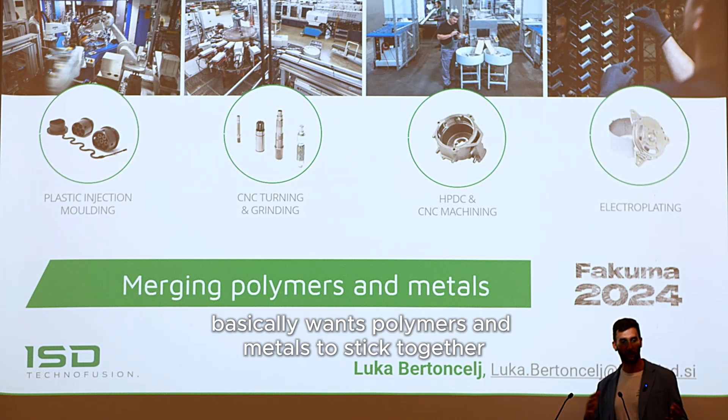Today I think we'll talk about quite an interesting topic: how to combine, join, or merge polymers and metals. We had a large discussion about what is the right word - is it merging, joining, fusing, or whatever? Basically, we want polymers and metals to stick together. This is one of the challenges that we kind of daily face. Just to have a background, our company has 4 major technologies.

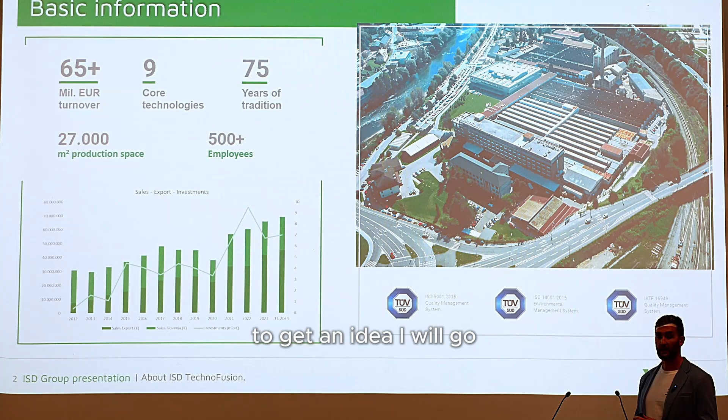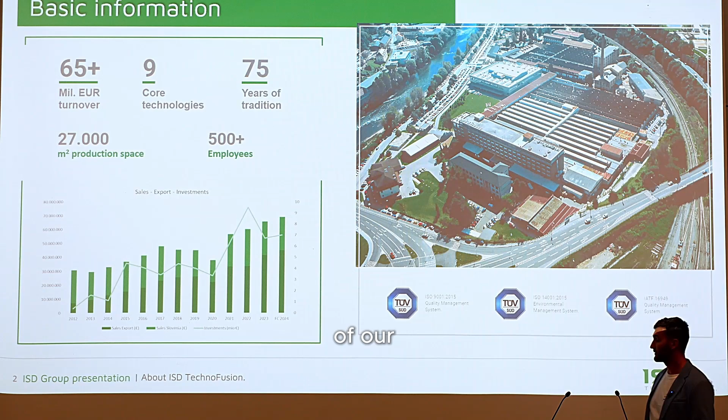We do plastic injection molding, turning, high pressure die casting with machining, and also electroplating. Just a few numbers to get an idea - I'll pass this quickly since it's an engineering presentation. I'd say we're a mid-sized European company, or a large Slovenian company, but Slovenia is small, so it's a large Slovenian company with just above 500 employees, around 65 million turnover, located in Kranj, close to the center of our city.

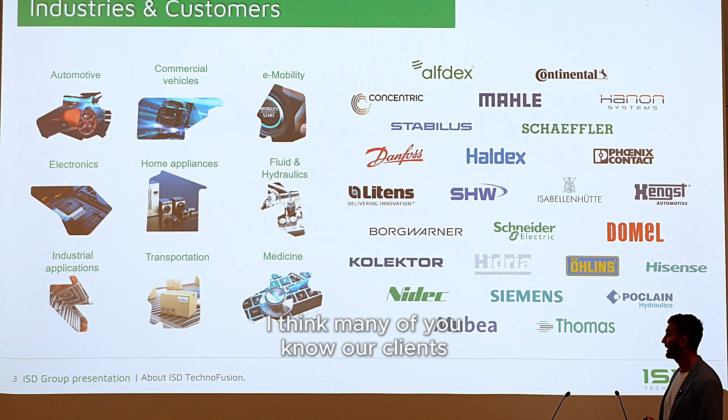We're more or less present in all major categories in terms of serial production, with automotive or especially commercial vehicles being the main one for us, but we're also present in electronics, home appliances, and basically all other areas. Here you can see the usual suspects - I think many of you know our clients. We're used to working with them, used to this serial production process and mentality.

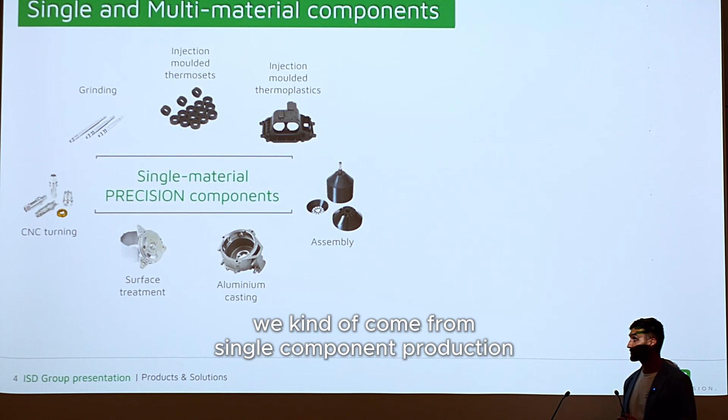Originally, I'd say we come from single component production - plastic injection molding, turning, high pressure die casting, and electroplating. But the real added value for us really lies in joining these technologies together. This means hybrid components - hybrid meaning combination of polymers, metals, or other materials. You can see the 9 major categories here.

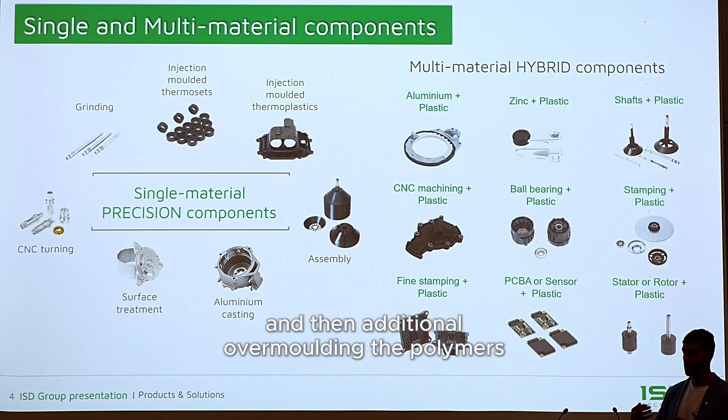The first one being high pressure die casting and then additional overmolding with polymers, then Zamak casting and overmolding, shafts first machined and then overmolded with different inserts, bearings, stamped parts, pins, connectors, again axes or shafts with stator packages and then overmolded, and also overmolding of electronics.

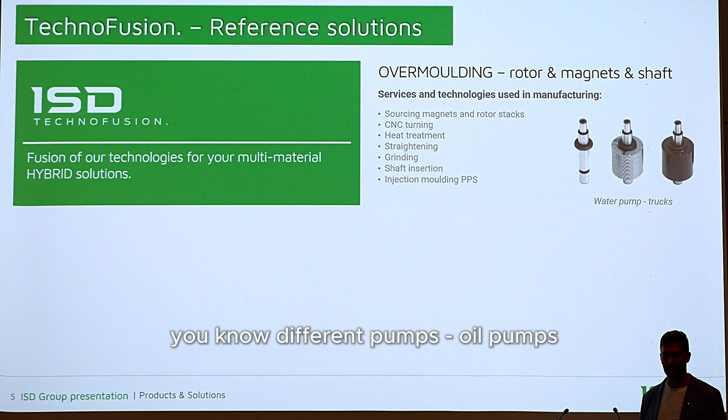To go perhaps a few more in detail in certain sections: overmolding of rotors and stators is one very important area for us, especially due to different pumps - oil pumps, water pumps - where you need a shaft that gets assembled with the stamped lamellar package and then overmolded with, let's say, PPS or PBT, then overmolding of shafts and additional magnet insertion, and also overmolding of stamped parts and bearings.

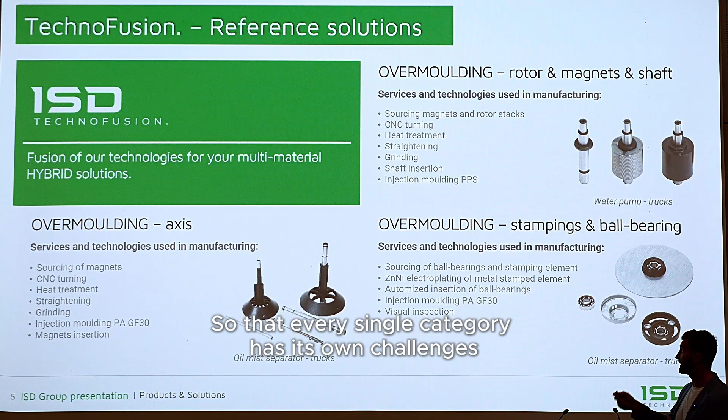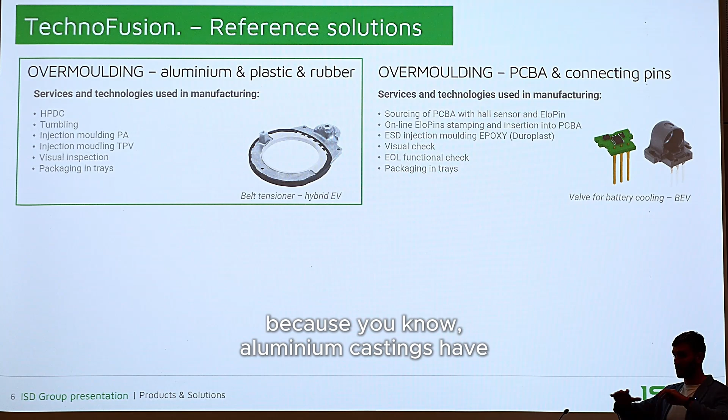Every single one of these categories has its own challenges. For example, if you overmold bearings, it's extremely important to have enough injection points so that you pre-tension the ball bearing all around, so you don't affect its lifetime. Every category has its own challenges. For example, overmolding of aluminum cast parts without machining is an extremely challenging task, because aluminum castings have a tendency to vary in thickness.

Overmolding of sensors or assembled PCBAs - again you have assembled electronics which can only sustain low pressures, not to be damaged. So we use special low viscosity epoxy resins to reach low enough pressures not to damage the electronics. Also overmolding of aluminum with aluminum, different shafts or inserts, and lastly overmolding of different pins, connectors, and so on.

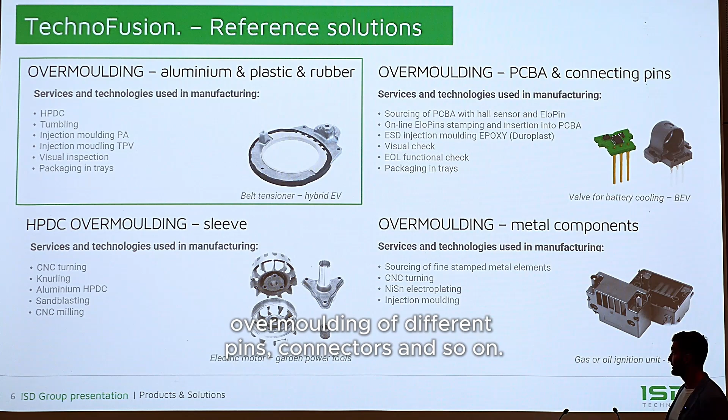What all these categories have in common is that we always try to bond or connect different types of materials, and their main problem is that they share no love - they don't want to stick together. They're like an old couple that wants to go apart, and now how to fix this connection, this bond between them - this is a very interesting area of research.

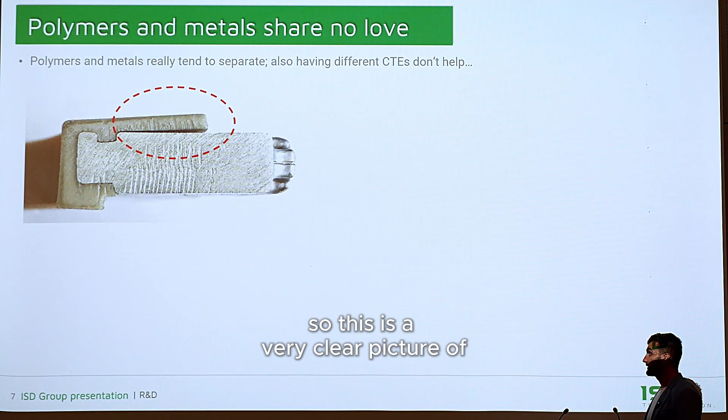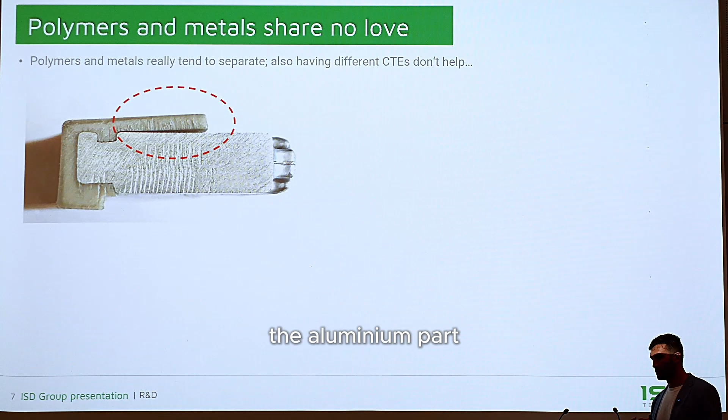This is a very clear picture of what problems we're facing. Basically you have, let's say, an aluminum casting, then you overmold a polymer on top, but the polymer wants to go apart. One of the challenges is that they have different coefficients of thermal expansion - if you heat up the component, the aluminum part will expand differently from the polymer part. You can compensate to a certain degree with different fillers - different portions of glass or carbon fiber or other fillers - but never optimally.

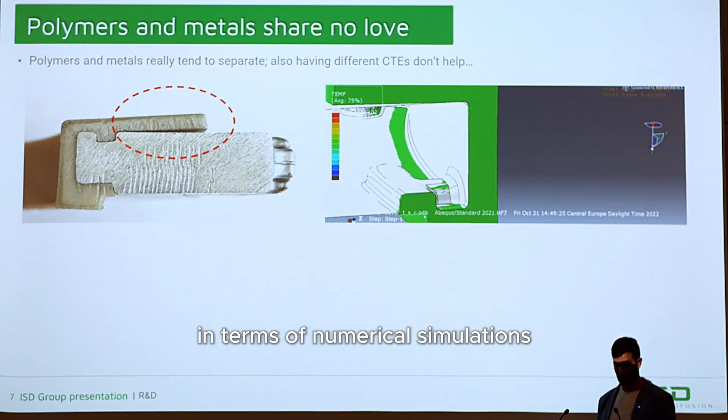And this can also be simulated, so all this can eventually be analyzed in terms of numerical simulations. But still, you get to a point where you ask yourself how we will solve this in production.

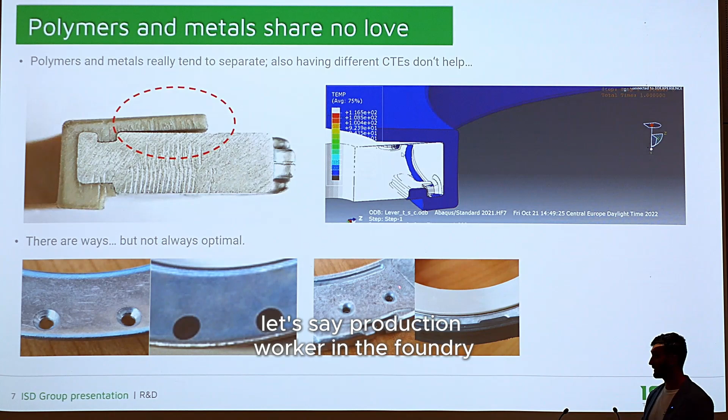There are different ways. Obviously you can have different holes or locking geometry on the castings or on the stamped parts. But if you talk to a production worker in the foundry or in the stamping industry, you will see that it's very difficult to deburr such holes or to punch them through. It's a very challenging task.

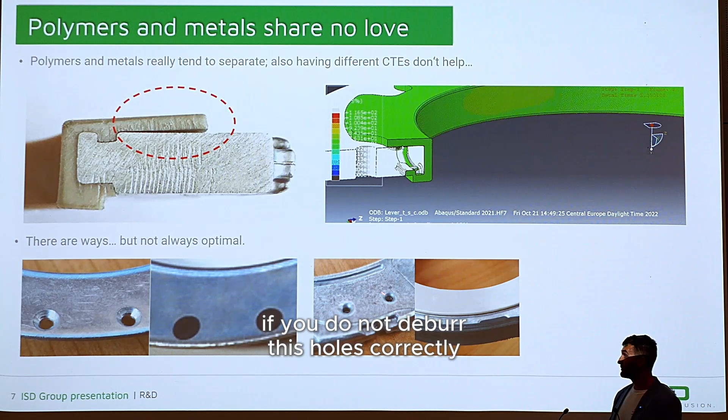If you do not deburr these holes correctly, when you injection mold the polymer inside, the hot polymer will remove some particles of the casting and flush them on the top surface, which causes scrap.

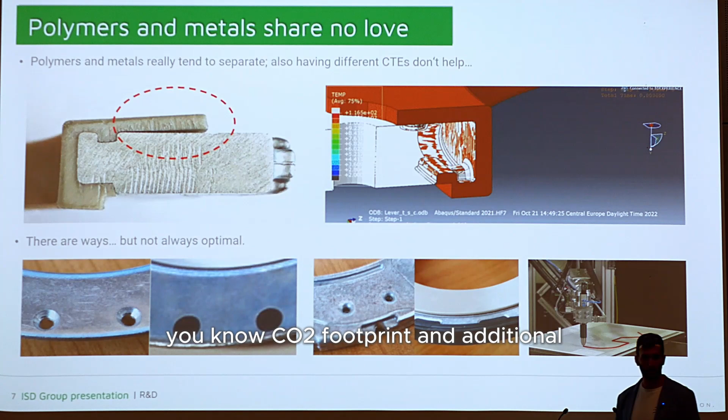Now the other way would be also with glue. But again, gluing is an unwanted process in terms of CO2 footprint, since an additional adhesive or chemical is used to connect them together. So it's not a favorable solution.

So in a way to tackle this challenge of combining polymers and metals, we developed, or are still developing, two technologies. The first one being LaserFusion, which I will talk about first, and the other one is SonoFusion, which is still in early stages of development, but I think a very interesting solution that might also be of interest to some of you.

So let's first move on to LaserFusion. Basically, LaserFusion is the process of using a laser source to modify the surface of the metal part. So why use a laser source?

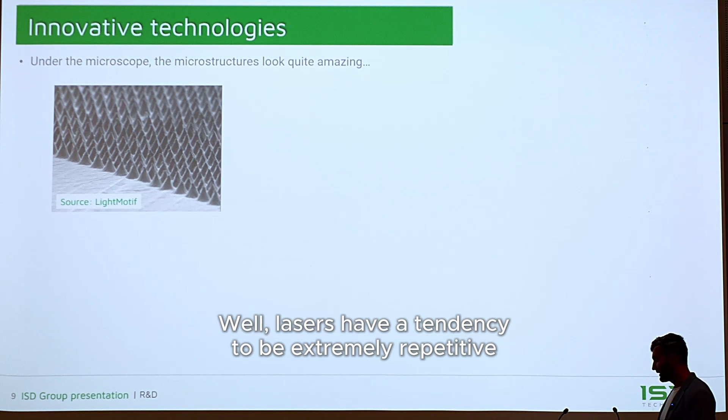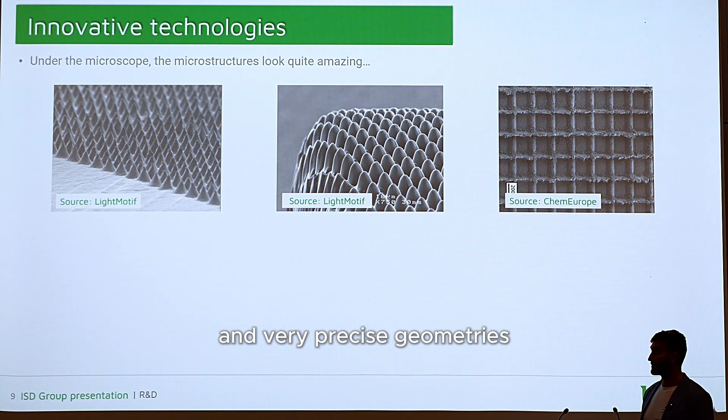Well, lasers have a tendency to be extremely repetitive. They have a very high repetitiveness. They're extremely precise. So if you take a microscope and look at different structures made using different types of lasers or different technologies, you can see that on a nanoscale or microscale, you can get extremely repetitive and very precise geometries.

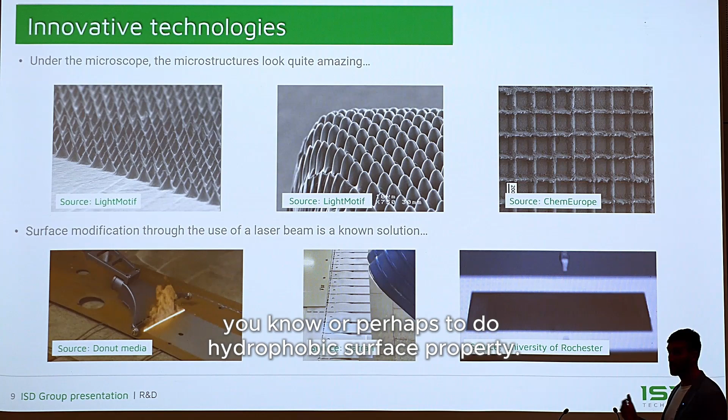That's one of the benefits laser technology offers. The other is that lasers have been used for quite some time, so they can be used for removal of rust on surfaces, to improve adhesion between adhesives and the second component, or to modify surface energy, or perhaps achieve hydrophobic surface properties. So basically, by modifying the surface structure, we can achieve a lot of different material properties without adding any additional chemicals, just by modifying the surface.

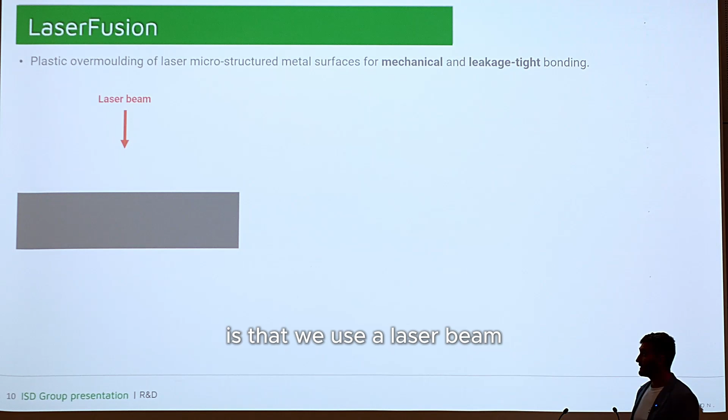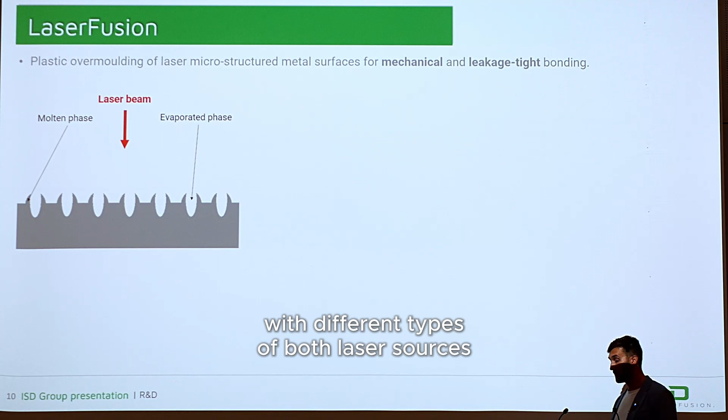So the way we do it, or a simplified physical concept of our technology, is that we use a laser beam which we focus onto the surface. We then partially evaporate and partially melt the surface using different types of laser sources and process parameters, and in some cases also surface preparations.

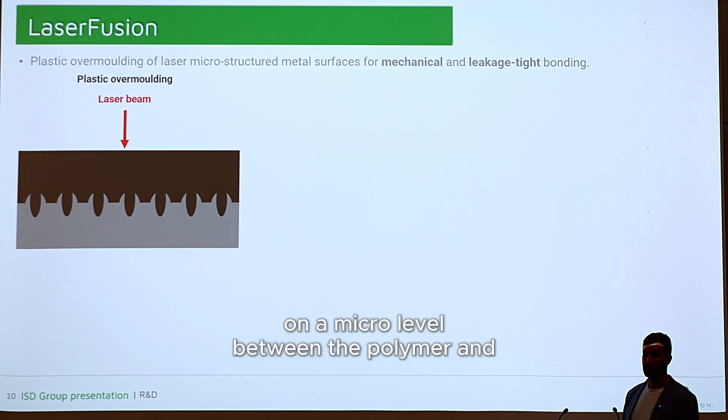We can then modify and get a negative mechanical locking on a micro scale. After this process, we do the overmolding, the injection overmolding, which basically allows us to reach a micromechanical bond on a micro level between the polymer and the metal surface.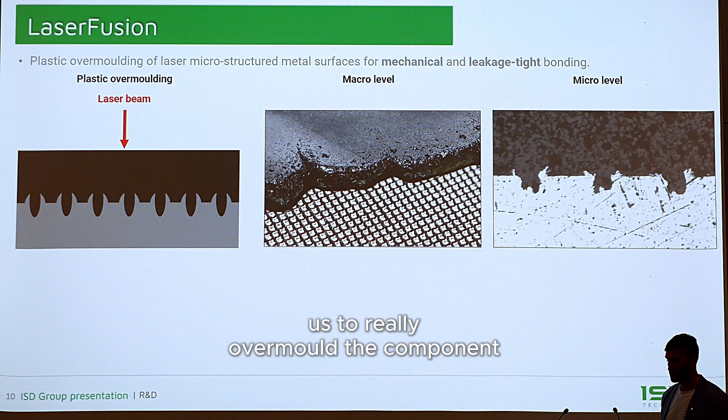So if you take your phone, because phones nowadays have very good cameras, you would see a very repetitive microstructure on a macro level that allows the polymer to penetrate inside. Or with a bit larger zoom or magnification, you can see very repetitive micromechanical locking geometries that allow us to overmold the component and achieve a polymer-metal bond.

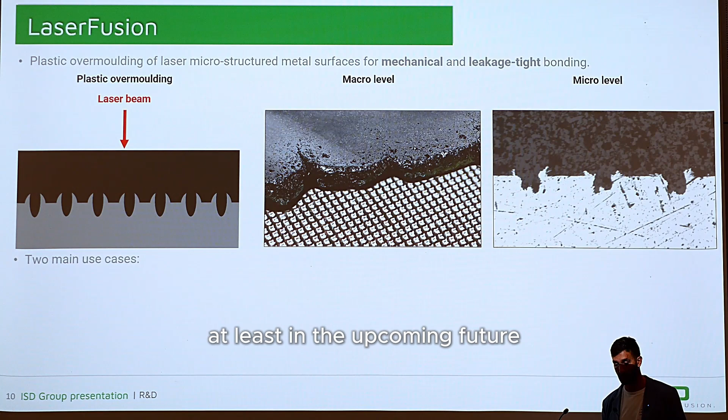So there are two main use cases that we see, at least in the upcoming future and also on ongoing projects. The first one is the combination of stamped or cast components with TPE overmolding.

For example, if you have large gaskets, like in this case, imagine assembling this - it's extremely difficult. It's a thin, long sealing that is very clumsy. If you imagine this in a serial production where a worker or an automated cell needs to position this O-ring or sealing on top so it doesn't get rolled or damaged during the process, it can be extremely difficult.

But in this case, we pre-prepare the part with the microstructure on top, and then directly overmold the sealing. This means we get much better precision. The tolerances don't sum up because we always use the same reference point, so both the quality, the leakage connection, and the end result are much better than with standard assembling. In this case, we used 3 different TPEs that were overmolded on stamped or cast components.

And in this case, we actually used rubber - a thermoset material that was overmolded over inox steel.

The other application we see used is for structuring of pins or connectors, because there's a quite common problem, especially with pumps, either water or oil pumps, where you get penetration between the pins and the polymer matrix. Even though the pins are overmolded, there is still a small gap during expansion and contraction that creates a capillary effect, drawing the medium from the high pressure to the low pressure zone. So it will not be leakage tight.

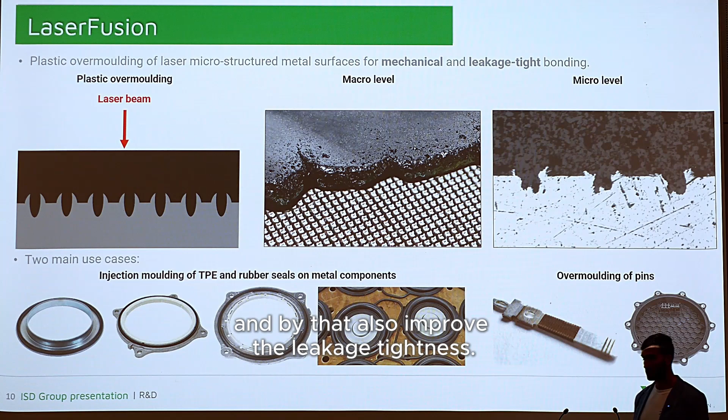In some cases you can solve this with a plasma treatment, but you are in a way limited to which polymers you can choose. In this case, we can structure the pin on a micro scale, overmold it, and by that also improve the leakage tightness.

So now if you look at the overall process scheme in comparison: first with gluing, and if you want to overmold or onmold a TPE sealing on top of a structured surface instead of gluing it.

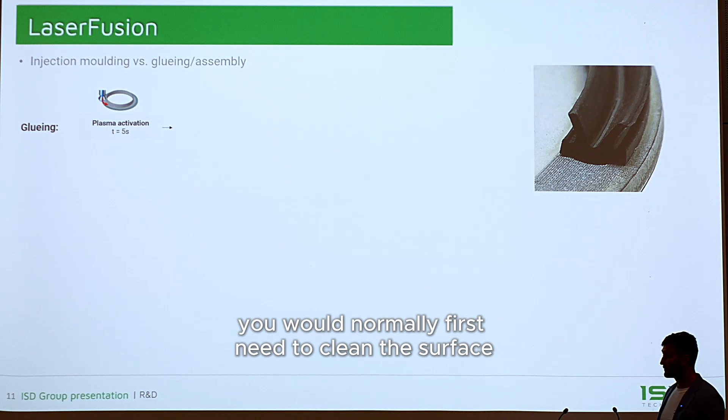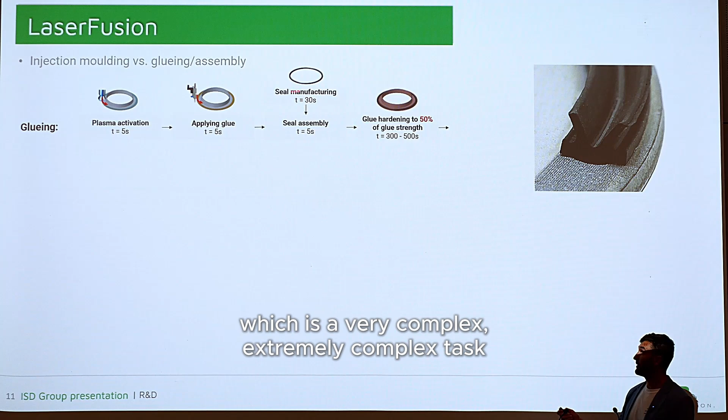So if you want to glue a component like that, you would normally first need to clean or activate the surface, using a plasma activation process. Then after activating the surface, you apply the glue, either two-component or single component. You need to pre-manufacture the sealing and then assemble it on top, which is an extremely complex task, especially to be really repetitive.

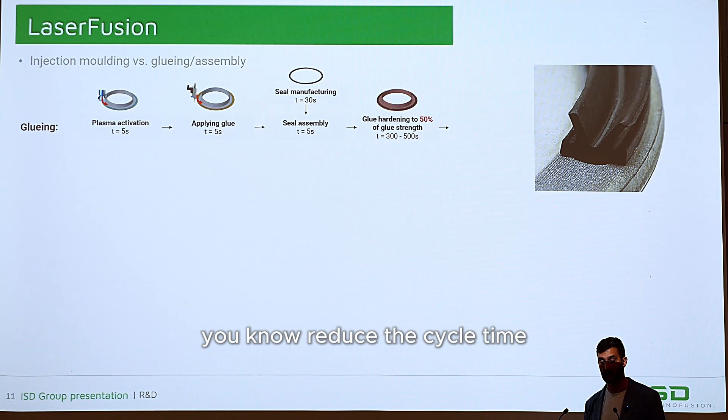Now if it's a two-component glue, you normally also need to preheat it, which reduces the cycle time, but it adds cost because you need an oven and inventory space just for the glue to harden. Then after it's finished, you get a part that's normally not completely hardened, so many times it hardens completely on the way to the customer during logistics.

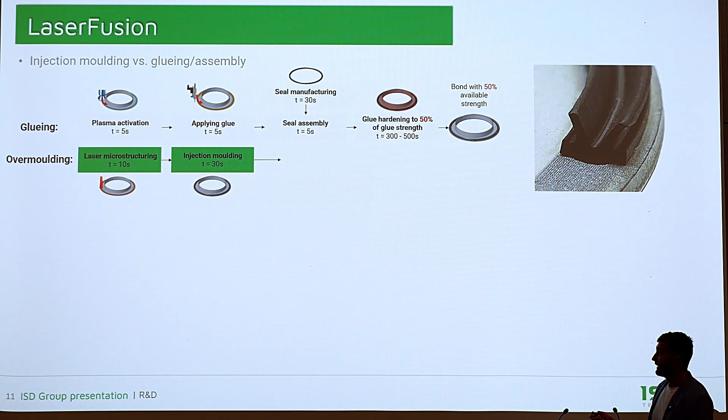In this case, with the overmolding principle, we do the laser structuring process right next to the production injection molding cell, and then directly onmold the sealing, and the part is finished with that. So we can already see at this stage how much simpler and quicker it is to get a finished part made with TPE overmolding.

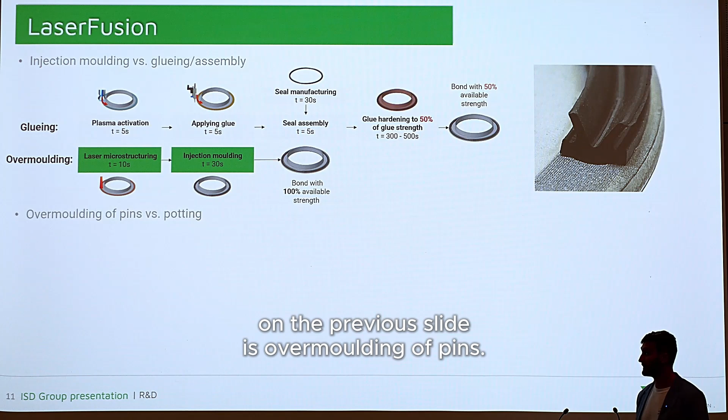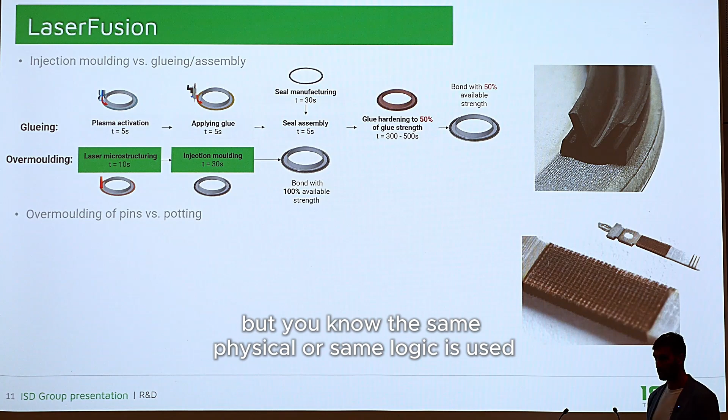The other case, like I said before, is overmolding of pins. In this case we do the structuring of the pin, as you can see here. It's a different kind of structure, but the same physical logic is used. And in this case, the competing process will be potting, which many of you know—a lot of our customers have used or are still using potting.

You basically first overmold the pins, create a small groove inside, and then pour the potting material inside this groove. The potting material creates a leakage tight bond between the pins and the polymer matrix, and then you need to harden it to get a finished part.

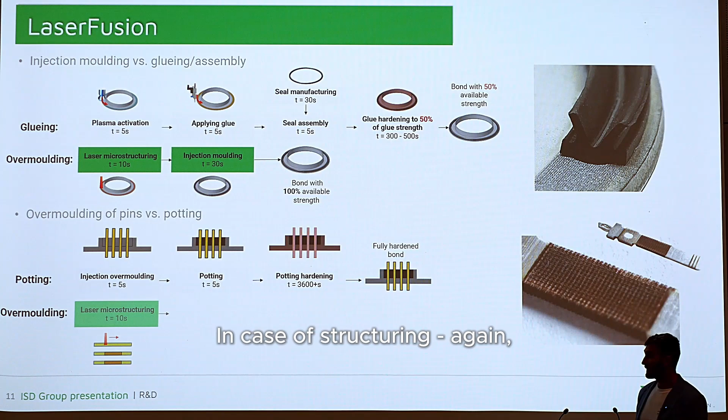Now the problem here is that potting itself is quite expensive—potting material is around 100 euros per kilogram. Even though you need small dosages, you still need a potting system. Potting material, nowadays when Europe really forces itself to be green and you need sustainable solutions, it's not probably the optimal solution.

In case of structuring, you pre-prepare the pins, structure them on the surfaces that are overmolded, and then directly overmold to get a finished part. So there are obviously a lot of benefits in terms of how many steps you need to get the end result of the finished product.

So, how do we develop this process, or how do we support our customers? We basically use two different prototype tools. The first tool is to produce a tensile specimen, as you see here. This is mainly used to determine different mechanical characteristics, or to produce thermal fatigue and then do tensile tests.

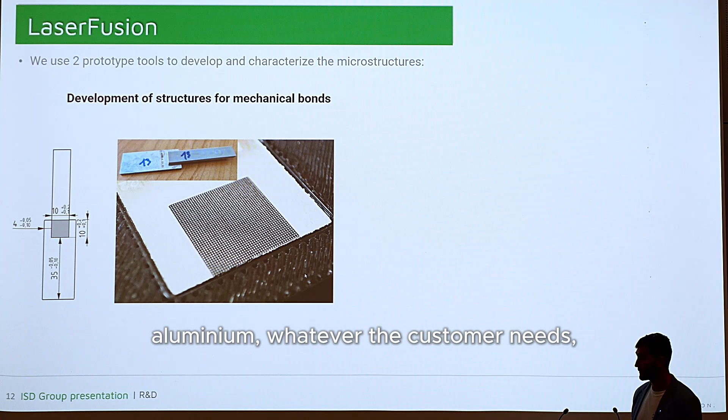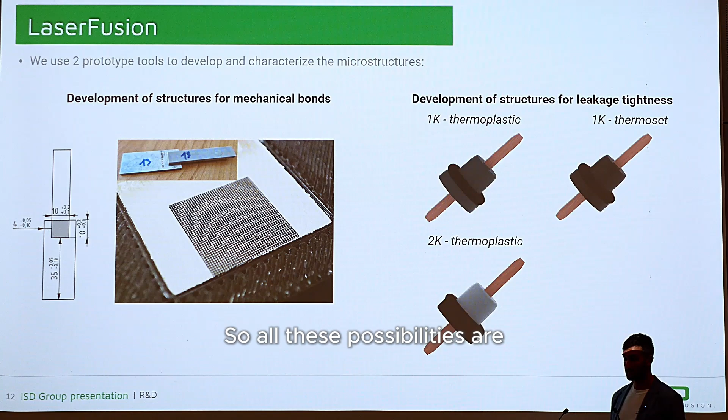We structure a surface 10 by 10 on a metal plate—it can be copper, steel, aluminum, whatever the customer needs. We structure the surface and then directly onmold the other half, the hybrid component, to perform the necessary tests. Or in case of overmolding of pins, we also have a prototype tool where we structure the pin and then onmold either one component thermoset, one component thermoplastic, or a two component, depending on customer requirements. All these possibilities are available to try out different material combinations.

And once these pins are overmolded, we can also perform a pressure test where we position the pin inside the rig, apply overpressure, and then measure the leakage.

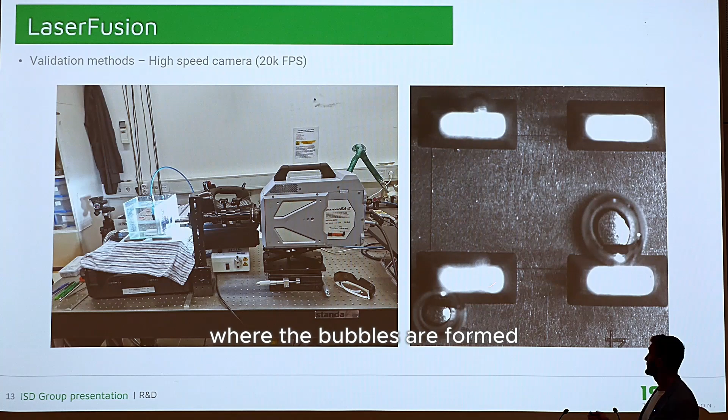To see if this structured surface holds the leakage test or not. These two prototype tools allow us to do the development, but aside from that, we also use several advanced validation methods. The first one, especially for leakage tightness, is a high-speed camera. So if you see that your part leaks, we perform a high-speed camera analysis where we see which surfaces lack leakage tightness, where bubbles form, and how quickly. We use different criteria to see how well the structure was or wasn't prepared.

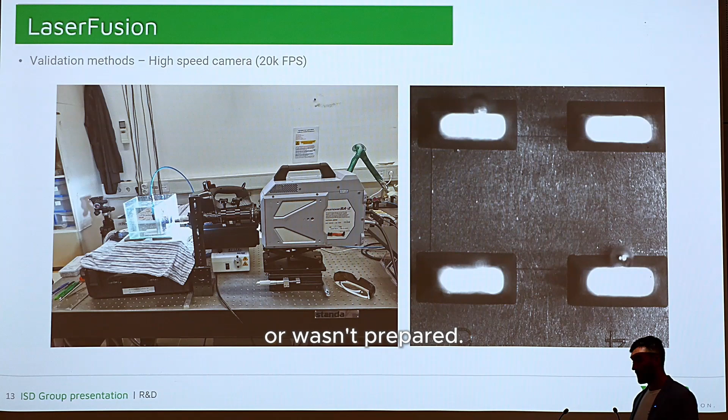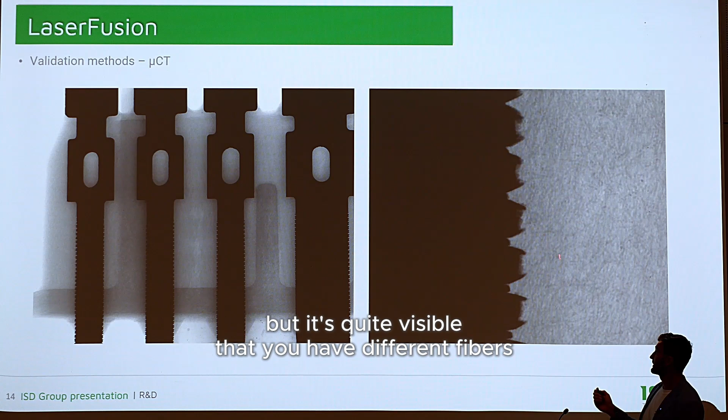The other method is micro-CT. We have our own internal CT machine, but for more detailed analysis we normally outsource a micro-CT analysis to see if bubbles formed, if the microstructure was damaged locally, and we can zoom in at a micro level to see how the microstructure behaves, including fiber orientation. You can see it's quite visible that you have different fibers.

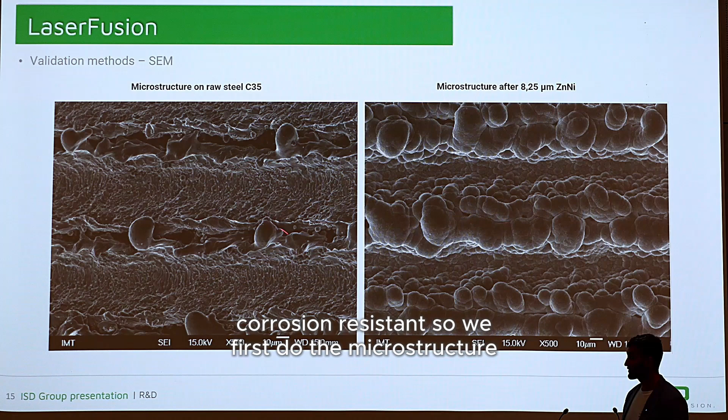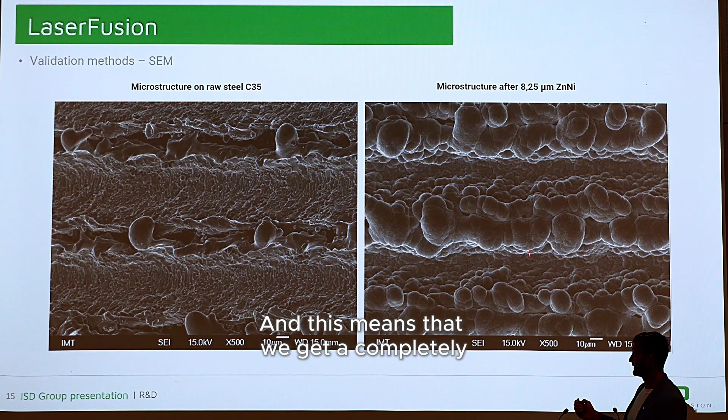And we also see how the fibers lock themselves inside the structure. Another method we occasionally use is electron microscopy. Here, we first prepare a microstructure on a steel specimen, which needs to be completely corrosion resistant. So we do the microstructure first, and then afterward the zinc nickel process. Because zinc nickel is a galvanic process based on electric potential, you basically offset the microstructure. This is then accommodated in the first microstructure so that the final microstructure is offset by about 10 microns thicker.

This means we get a completely corrosion-resistant surface which is microstructured and can be directly overmolded. We also have other methods, like tensile tests, thermal cycling or thermal fatigue tests, pressure tests on this hybrid part, or corrosion tests. So we can really expose these structures to different types of loads, chemical, temperature, or mechanical.

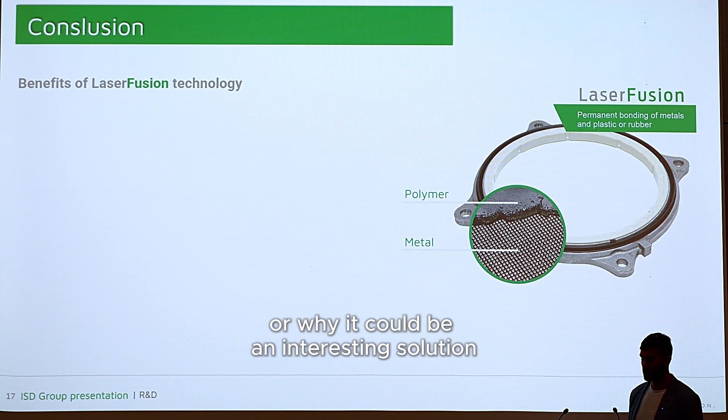So to sum up the benefits of this technology, or why it could be an interesting solution for some use cases you or our customers may have: first of all, you remove a lot of additional chemical treatments or use of adhesives. In general, you do not need plasma activation. It can be beneficial, but in some cases it's not necessary, and without it the structure still works. Again, it really depends on the requirements of the end customer.

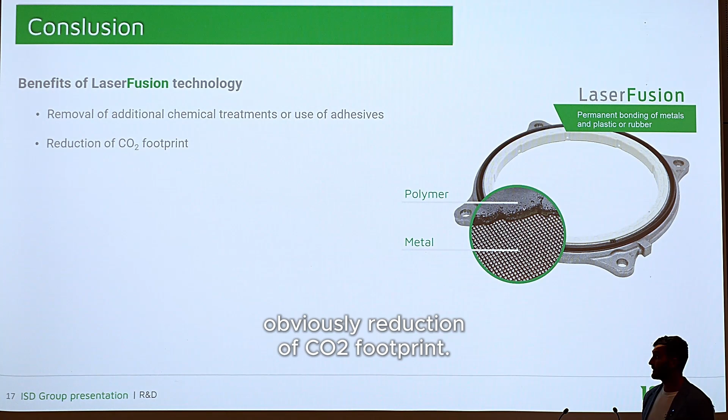The other benefit is obviously reduction of CO2 footprint, again related to the first point, because it removes the use of chemicals. Also, laser structuring or laser technology itself is extremely energy efficient and focuses the energy just on the point you're targeting.

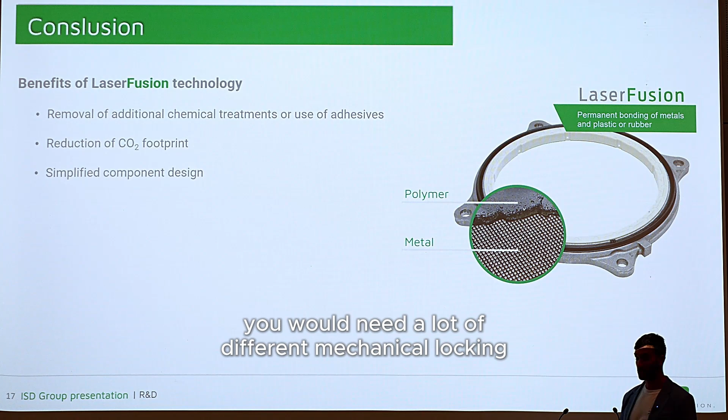It also allows a very simplified component design. Normally, if you wanted this TPE sealing to stay on top of an aluminum casting, you would need a lot of different mechanical locking geometries, as I showed in the first two slides, lots of hole features which create a notch effect in the casting or stamped part, requiring a larger part to withstand the loads. In this case, you can have one seamless geometry without any holes, which reduces the weight and size.

Also, a shorter and simpler process flowchart, which I think you understood, especially as we're moving from assembly steps to production steps. This means we want to reduce assembly steps and any manual labor in between, and instead move on to consecutive production steps, going from one tool to the other, which also improves overall quality.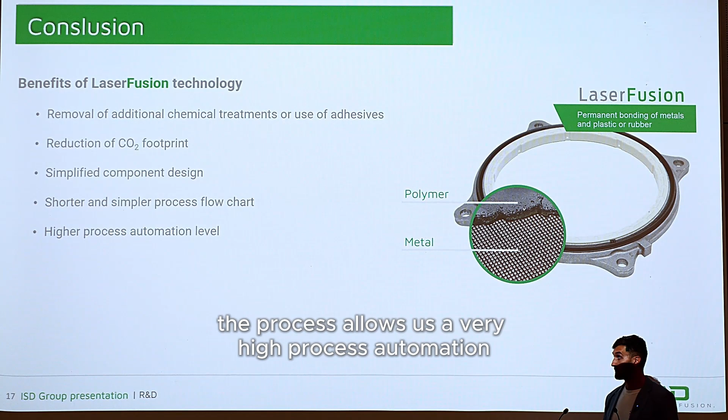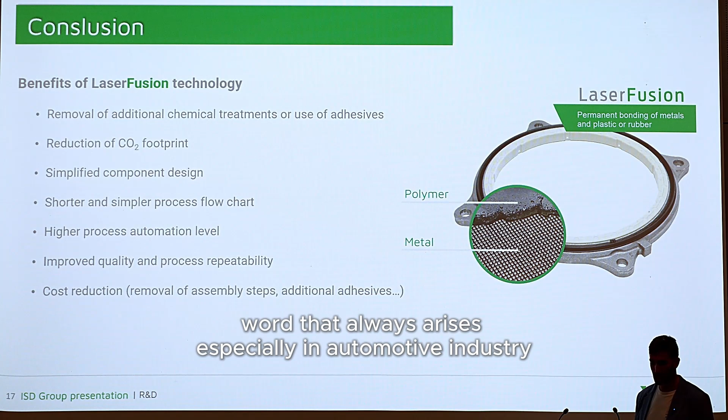And obviously the process allows a very high process automation level. As I showed in one of the first slides, it also improves both quality and process repeatability, because the laser technology itself offers repeatability on the scale of nanometers. And the one word that always arises, especially in the automotive industry, even if you wake up at midnight you hear it: cost reduction. If you plan production right, and use this technology from the product development stage, it will definitely allow you to reduce cost, especially compared with assembly steps or other technologies that need many more production steps and may cause a larger scrap rate.

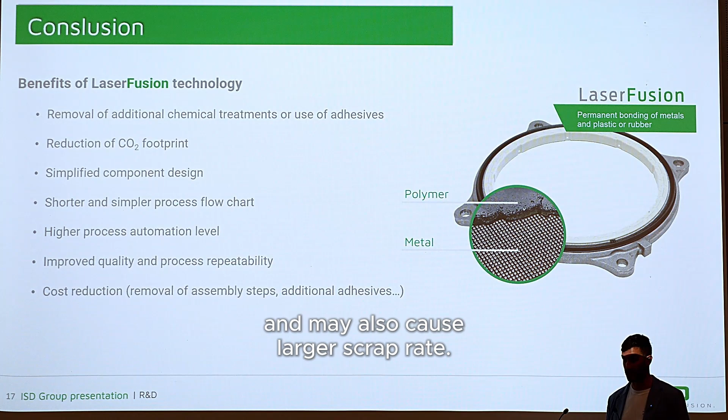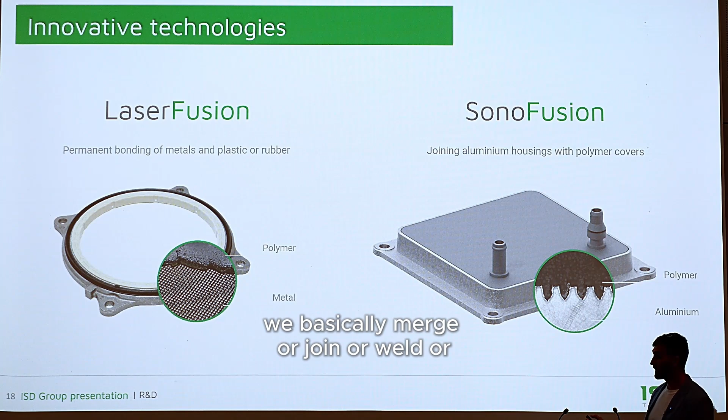So the other technology that I was also talking about, and I think is also very interesting, is SonoFusion. SonoFusion has some similarities with LaserFusion, but the main difference is that in this case we basically merge, join, or weld already pre-molded plastic covers with an aluminum housing.

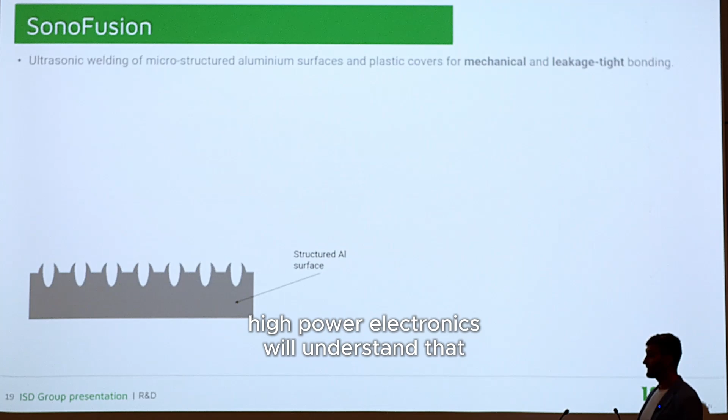So why would you need something like that? If any of you comes from electronics development or high-power electronics, you'll understand that in some cases, when the electronics heat too much, you need active cooling solutions where glycol goes through an aluminum casing. Aluminum, because it has very high heat conductivity, drains the heat from the electronic source and puts it inside the glycol or water, removing it from the system.

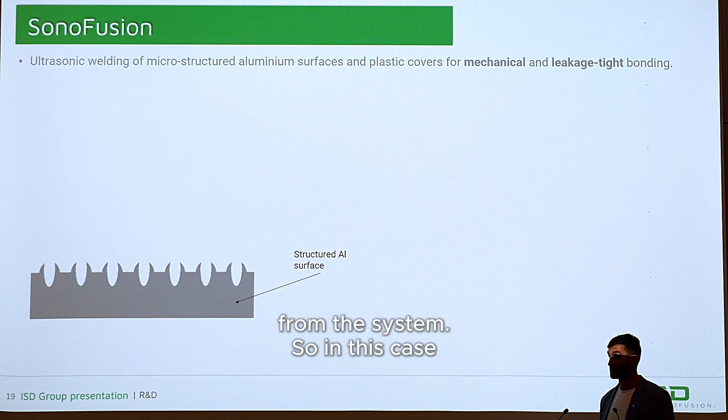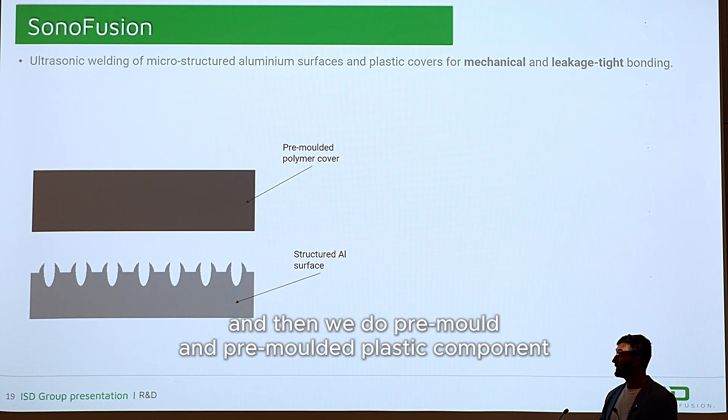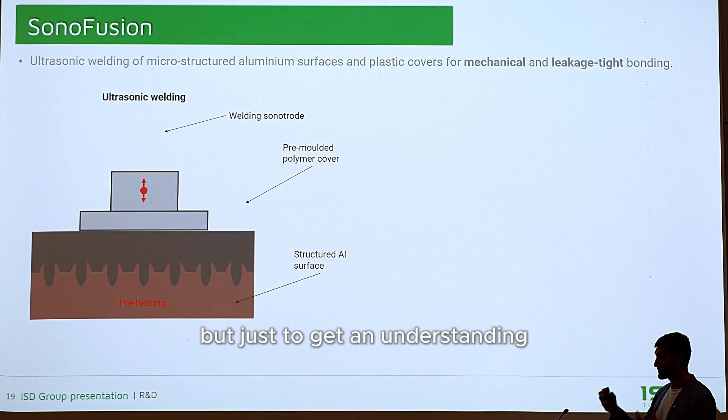So the logic we use is that we first cast the aluminum component, apply the laser structure on top, and then we do a pre-molded plastic component. We use a welding sonotrode. If you know ultrasonic welding, we have a custom sonotrode. We preheat the structured aluminum surface and basically weld them together the same way as you would normally weld two plastic components with ultrasonic welding. The philosophy is the same. Obviously the devil is in the details, but this cross-section should help you understand what we're trying to achieve.

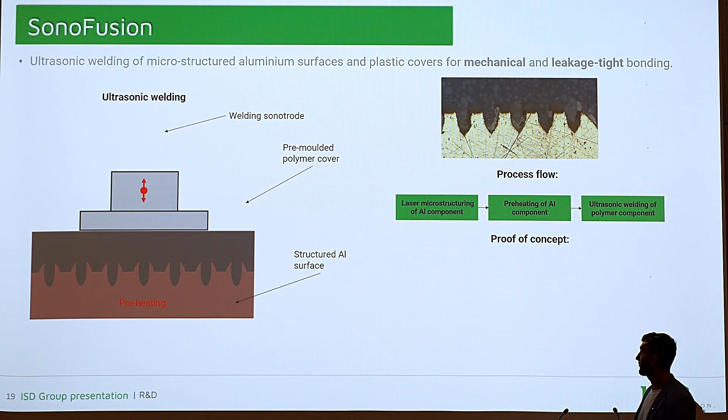We first started with proof of concept development, using small aluminum cylinders with different kinds of structures on top, which we then welded together—first with 3D printed covers, and then injection molded covers to test leakage tightness. Since we got really good results, we are now moving on to a larger prototype.

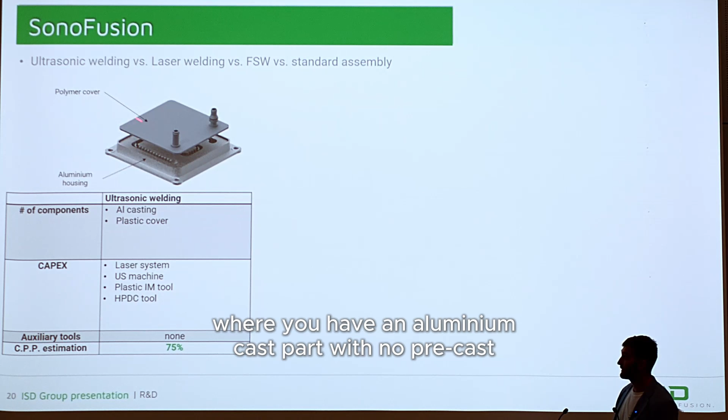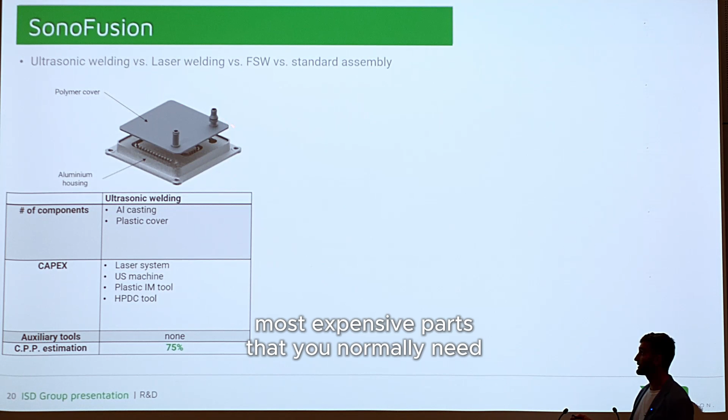So what is the end goal? For us, it's to design, produce, and validate a component like an inverter housing, with an aluminum cast part with precast cooling channels, and a pre-molded plastic cover with pre-molded connectors already on top. These are one of the two most expensive parts normally needed, because they're typically produced with turning. We directly structure the surface and weld on top instead.

The competing technology would be laser welding, where you'd normally use an aluminum housing, stamped or cast, and weld them together using a laser beam. But you still need two separate turned connectors which need to be assembled.

The third competing technology would be friction stir welding. I'm not sure how familiar you are with this, since it's more known in the aluminum casting industry. You basically have a tool, like a CNC machining tool, that drills into both the casting and the cover and fuses them together with friction. But you still need different connectors assembled afterward.

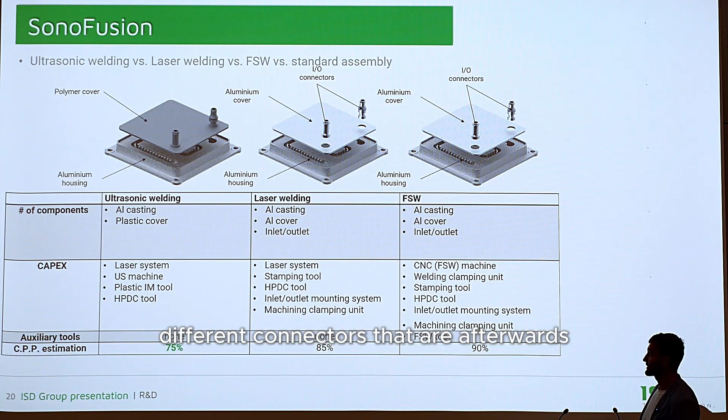Lastly, the process we definitely want to avoid, and which is also a competing process, involves a cover with a lot of different screws, a sealing, and connectors—many manual assembly steps required to produce a part with the same function. We estimate, compared with this standard procedure, that we can save at least 25% of the cost for producing a component with exactly the same functionality.

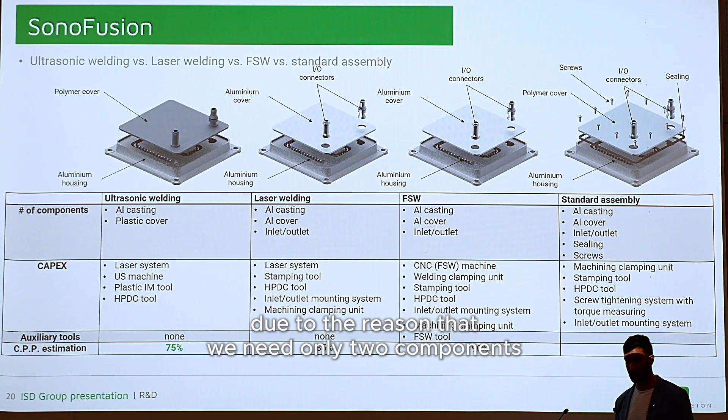We definitely see that we can be cheaper than all other technologies too, simply because we need only two components that can be cast and injection molded and directly merged together.